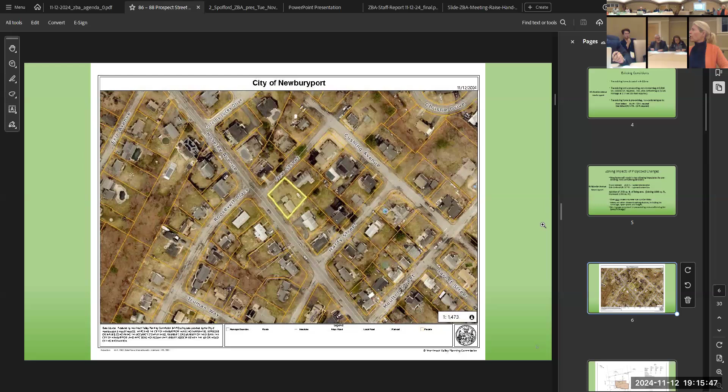First, this is our proposed site plan. This jagged line represents the footprint of the existing home. Here's the garage, with a breezeway that connects it, and here's the existing home. We are going up on these outside walls, so this will be the upward extension on the right side, and this will represent an upward extension on the front yard setback. And of course, this is the footprint of the new structure, essentially going up over the existing house plus this added section.

I'd also like to point out that we are changing the location of the driveway. Currently, the driveway is here off of Moseley Avenue. My clients are moving the driveway off to the side, off of New Street, which would be greatly beneficial to the property and to Moseley, since they won't have to be backing out onto that street anymore.

We've received comments from the DPS, and they are fine with the new curb cut here. I think they agree it's a much safer access to the home. We will have to repair some sidewalks here and provide a new street tree, and I suspect my client will put a street tree here as well just to make it look nicer. So we're more than happy to meet the DPS requirements.

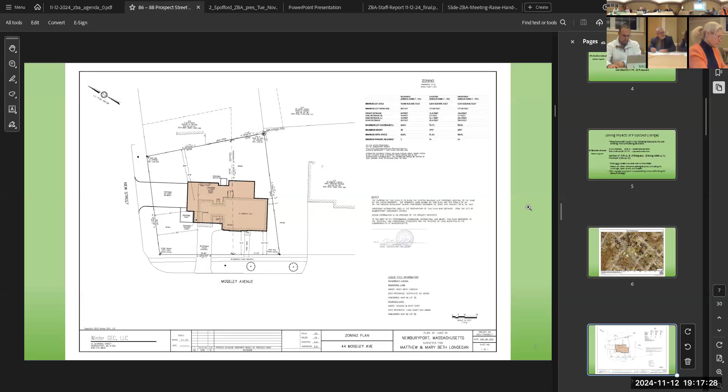Let me show you some pictures. This is the existing footprint of the existing home. As you can see, we've got a first floor here, the garage, and upstairs is an open bedroom area.

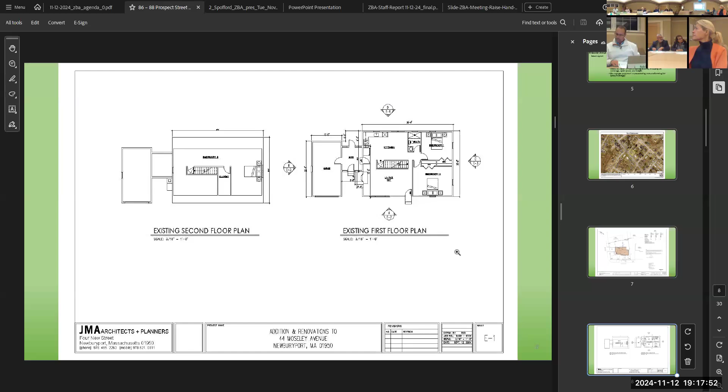Here is an elevation of the existing home. Our existing height, as I was just discussing, is just under 16 feet - it's about 15.9 feet. But that's the elevation of the existing home.

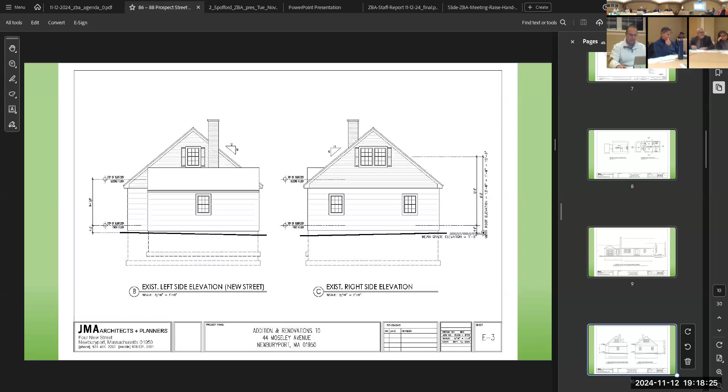These are just the elevations of the two ends of the existing home - this being the garage, this being the right side. And lastly, there should be an elevation of the rear of the home as it sits today. So there is our existing conditions. Again, our mean roof height is just under 16 feet.

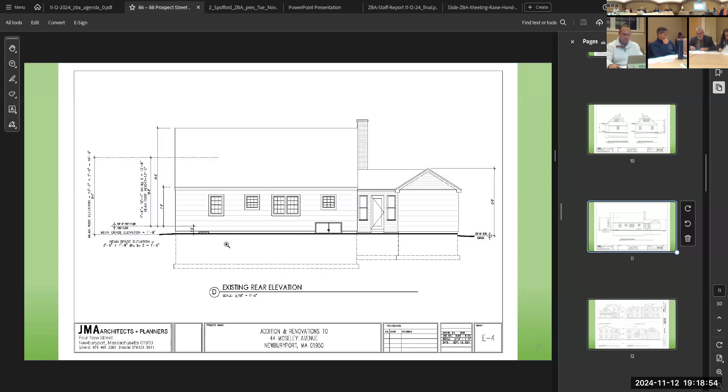And we'll be going up to just under 26 feet, so about a 9 to 10 foot increase in height, but we will still be well below the limit of 35 feet - some 9 feet below that.

So these are the elevation drawings of the new home. This is the front elevation that will be facing Moseley Avenue, and the garage is over here on the right off of New Street. This is the left elevation that will be facing New Street - you can see that our main entrance and our garage will now be on the side.

And then at the other side, we have the right side elevation here, and this is our rear elevation with the garage being here. Again, this new structure is proposed to be at 25 feet, 9.5 inches in mean height.

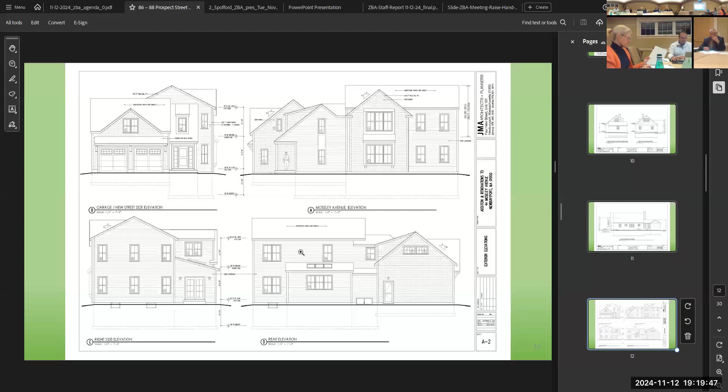These are the floor plans for the new home. As you can see, they are proposing to put a master bedroom suite on the first floor with dining and living space, bathrooms and laundry. Upstairs will be 3 additional bedrooms and 1 bathroom. And then this is the shop room that's proposed over the new garage.

My clients, as I understand, this home has been in my client's family for a long time. She grew up in this home, and so now she's rebuilding it.

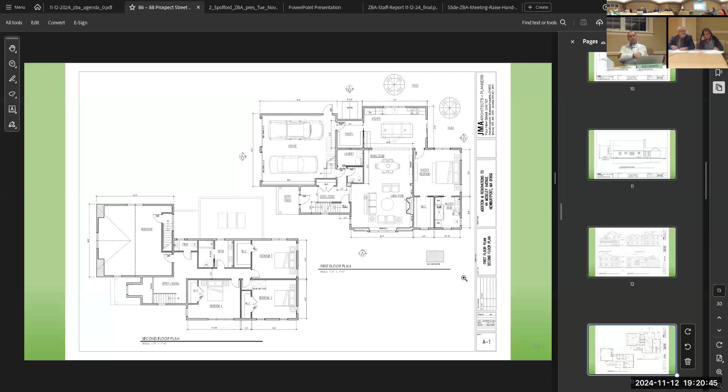They're rebuilding it so that she and her husband can retire here. That's why they're putting the first floor master in, so they can age in place. Interesting story - this has been in her family for years, and this is where Mary Beth grew up. If we go to the next slide, that's the basement floor plan.

Sorry to bore you with that one. I'm sorry, Kate, I know we're going to get to a picture eventually here.

Their daughter is living there, and I think our clients are going to move in there while the new house is done, and then they'll move into the new house, and the daughter will continue to live next door.

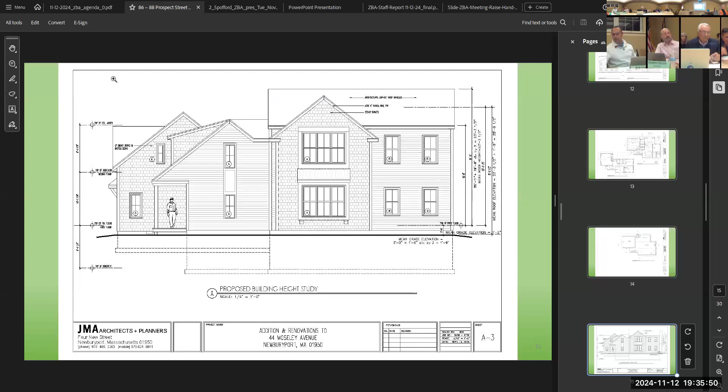Very good, motion with condition has been made by Mr. Bennett. Do we have a second? Thank you, Ms. Scow. Motion is made by Mr. Bennett and seconded by Ms. Scow. Calling the roll: Mr. Delisle, yes. Mr. Bennett, yes. Mr. Ginta, yes. Ms. Scow, yes. And Rob Champetti, I vote yes. It's 5 in the affirmative, the ayes have it, motion carries.

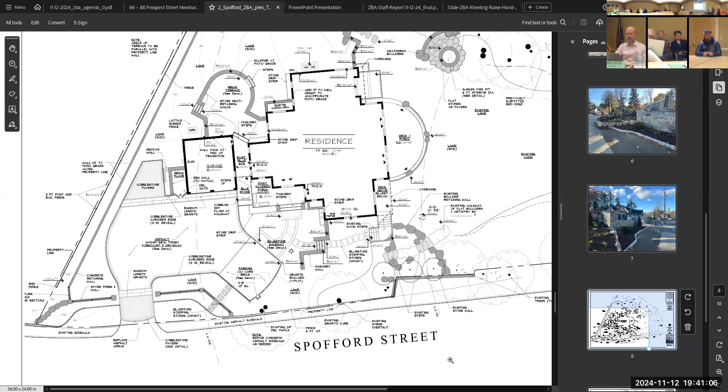Very good. Anything further that you want to highlight in the presentation? We have all of this in front of us as well, but no, it's fairly self-explanatory what we're asking for. I don't think I have anything further. Great, thank you. You're welcome.

We'll close the presentation portion of the hearing and go to public comment. Anyone in the room? Seeing no hands, anyone online? Seeing no hands, so we'll close public comment and go to questions from the board. Anyone want to jump out first if there's any questions?

Help me to understand this. I take it you constructed the stone fence, correct? Correct. And was this an ad hoc decision that was made in the field that you wanted to

add this additional 2 feet of lattice work? Is that how this came to be? Under the permitting process that we went through for this, it was unbeknownst to us, we were just unaware that we needed a variance for a 6 foot fence within that, just because of what was existing there. So that got skipped over. And when this went through, the real permit that we went through was all through conservation. So all this was on the original plan to go through conservation.

Under the construction of this, it was brought to our attention pretty quickly that we needed a permit for all these regulations. So we did go and get a building permit, and that got passed through every department because we've met the criteria for the 4 feet of structure. So we're really going for that extra 2 feet and the 6 foot fence going down the property line. Zoning passed this portion because they weren't going to count the columns at this current time, under the understanding that this was a fairly simple process. So yes, it was always thought to do it this way, but it wasn't an afterthought. It was just this whole process is an afterthought, so unfortunately.

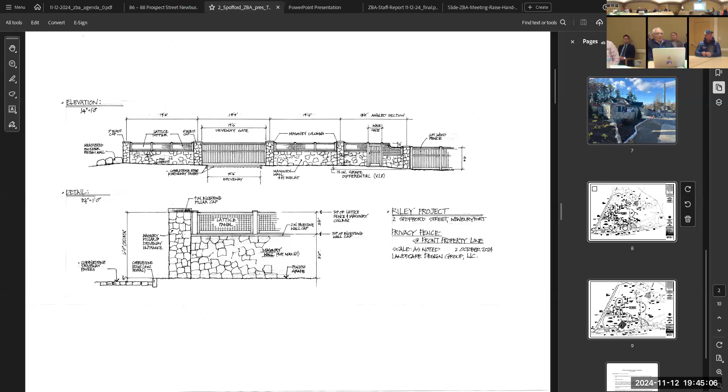That 90-foot expansive fence will be stone? Nope, it'll be the same fashion here, 4 feet. If you look on the far right of that last picture, yeah, no problem, right there you can see the stonework ends and then just a 6-foot fence carries on. And what's the nature of that fence? That would just be wood, I would assume. It's going to be probably a cedar of some sort, 5 feet tall, and then the last foot is going to be a lattice.

So will it be a picket type fence or will it be a solid fence? Solid for the first 5 feet. Solid for the first 5, yep.

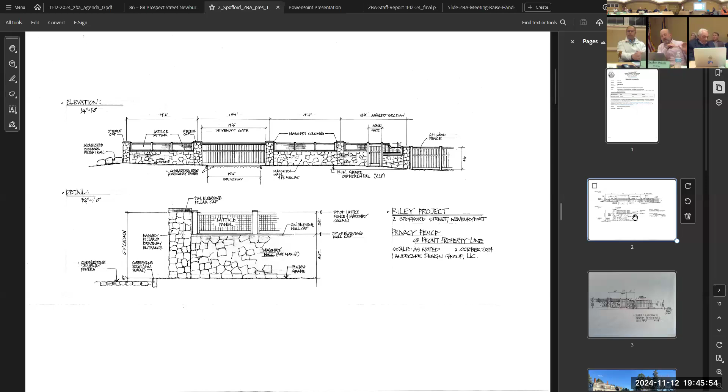Okay, Gary. Okay, Mr. Delisle, you had questions? Yeah, just sort of following up, so the stone wall portion, how many feet is it from the corner where it begins through the driveway to the corner where it ends, how much? The stone wall portion, I'm not understanding your question quite there. If I can pull up the site plan.

Yeah, the stone wall from the corner on the left to the place on the right where the stone wall ends, how many feet is that? Oh, it's approximately 17, 23 through 40, and another, and then it returns back to the street, so you're going to be probably like roughly at 50. So that's 50 feet worth of stone wall. Mhm. Plus lattice at 6 feet tall.

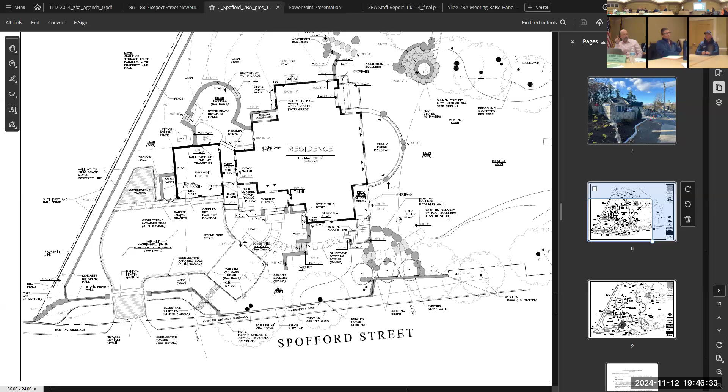Stone 4, lattice would be 2. Yeah, on top of, so in total it's 6 feet tall, right? Correct. Yeah, okay, so that's, then, what you said, that was 50 feet? Mhm. Okay, so then you have that plus 80 or 90 feet, so we're looking at 130. No, it would, it's probably closer to like 75 from the end of the stone wall to the end. It's not as long as 90, that would include the wall portion of that. Okay, so it's roughly 125 feet of 5 to 6 foot wall

along parallel to Spofford Street. Correct. Yeah, if you're including the wall and the fence as a wall. Yeah, in total. Yeah, okay.

Mr. Ginta, was there an existing fence that stretched that 80 feet? Yes. And how tall was that fence? There was one existing that was 4 feet, white picket, with tall plant material around it that stretched above 6 feet. It's all ornamental grass with large rhododendron shrubs in there.

And then from that point, there was a space in there. I don't know if the fence blew down before we got involved with the project, I don't know why that gap was there. But then it carried the 6 feet all the way to the bridge that's still standing today. It's still there, that fence is 6 foot right now. Well, the top of the fence is 6 feet, but it's 5 feet with a 1 foot of lattice on it, and it's vinyl.

And the ordinance talks about front yards. Is this the front yard of this home? It's kind of in a little nook. We always consider this a contention with everybody, but technically it's where the front door is, and the front door would be on the driveway side. So yes, I would have to think that is considered the front, but the front of the house, the architecture of the house really is from the deck all the way down towards the river. That's how it's architecturally designed, but the front door is kind of on the side, on the driveway side.

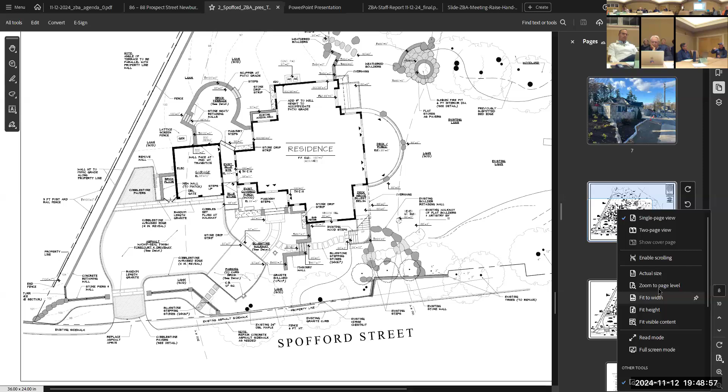So from the owner's perspective, through you, why not a 4-foot fence? What would be the reason for a 6? The bigger reason against the 4-foot fence is it doesn't do anything for the traffic. Being at the elevation the property comes up, you're standing on the porch, your feet are basically at the height of that 4-foot fence. So if you're in your driveway, 4 feet's only to here, and all the cars and the noise is right there because it's so close to the road. So the 6-foot fence just gives you a little bit more privacy from that roadway.

Yeah, I know this house well, only from driving past it every day. Me too. I see the work that you're doing there, and I understand the conditions you're dealing with there. It's a very loud and noisy site. Okay, thank you. You're welcome. That's all, are you? I'm all set, thank you.

I think that goes to one of the elements we're looking at here, that to grant a variance, the lot really is unique, and what you're seeking is because of the uniqueness of the lot.

Can you go to, there's a picture here with an overview. It kind of shows the topography of the lot. If you could just review that a little bit, because it does seem quite different than the standard lot in Newburyport. It's been a challenge. I know, it's in the staff report. Yeah, that, if there is such a thing as a standard lot in Newburyport. Well, that's true, true.

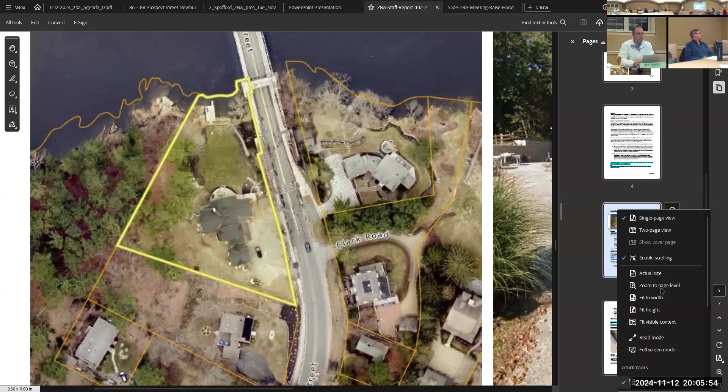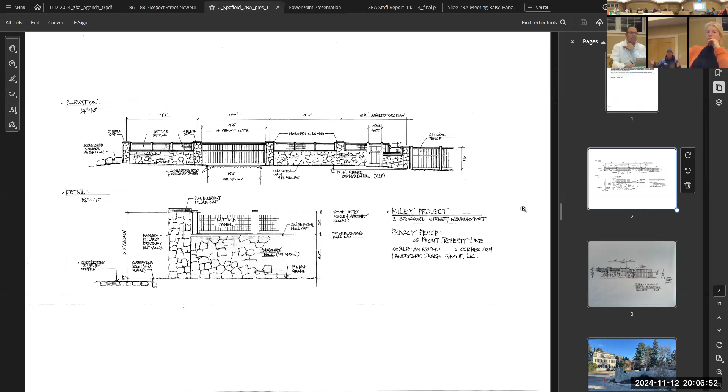Solid wood. And did you say that where there's a cedar fence going down to the water, there's currently a vinyl fence there that we're going to leave, since it's existing? I think that existing section of fence is roughly 45 to 50 feet long as it stands today, so we have a gap here.

May I ask a question? Of course. My colleague's concerned about safety, is the entire lot fenced, including the portion that goes down towards the river? We have a fence that goes across the top of the wall, from Spofford Street back to Moseley. Then there's just a natural stone wall that separates the property, and a fence we're proposing to go from the corner of the lot back to the bridge to fence it out. But there's not a fence on the Moseley side, that's the only side without any fence.

Can I interject? Please do. Thank you. So the vinyl fence is still there? Yeah, it is. All but 20 or 30 feet of it? I didn't pull a tape measure out for it, but all but, let's call it 30 feet, that's between the wall and where the vinyl fence starts.

I'll make one observation. I am not so much concerned about the lattice work on the stone fence. It's tasteful. Is it greater than 4 feet? Yes, it's not solid. It's arguably within the spirit of what the city council was getting at when it didn't want high barriers blocking people in their home.

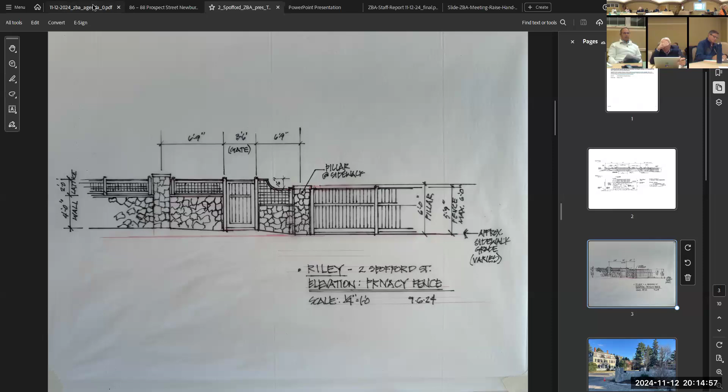So we'll see you on the tenth, and thank you for your patience and time. No problem.

Moving on to our fourth and final application this evening. This is the application of Judith Bliss Welch, trustee of the Judith Bliss Welch Trust, care of Lisa Mead, Talman and Costa LLC. This is the application for 101 Curzon Mill Road, a variance request. The applicant seeks all necessary approvals and permits to construct a garage with a second floor office. Thank you for your patience.

Thank you. It's been enlightening.

Thank you, Mr. Chair and members of the board. Lisa Mead, Talman Costa, 30 Green Street, on behalf of the applicant, Judith Welch, trustee of the Judith Bliss Welch Trust. With me this evening are Richard and Judith Welch, the owners of the property, and also my colleague Ryan Clemens. The architect on this project is Andy Sidford, the engineer is Everett Chandler, and we have a wetland specialist as well. Tom Hughes will be doing the permitting from the conservation point of view. As the chair indicated, the Welches are seeking a variance to construct a garage on the property, which is across the street from their home.

If you go to the next slide, Caitlin. The property is across the street from their home, which is the former mill on Curzon Mill Road. If you drove down Curzon Mill Road past Maudslay State Park to the very end, the Welches live in the mill, the last house on the left, right before the bridge you can walk across into West Newbury. I have a long story about that bridge from when I first came there.

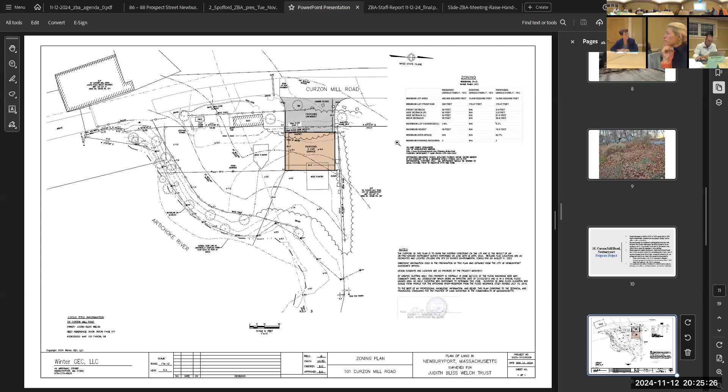You can see the floodplain lines running through, along with the 100-foot, 25-foot, and 50-foot buffers. The buffer line actually runs through the lower left-hand corner of the proposed location, so we do need Conservation Commission approval for this. But that's the location on the lot.

Next slide, please. As indicated earlier, this is the Conservation Commission plan, showing that it's built on pilings. The reason is you can't take up any flood storage area in the floodplain, so it has to be built on pilings, with the horizontal members of the first floor above the floodplain.

You're allowed to have the vertical posts, but you do have to make up the flood storage area for those. Otherwise, we have to raise it above the floodplain. So as you come in off the road, you'll go up a little bit, with a small ramp to get to park your car on the first floor. Those are the elevations and the Conservation Commission map.

You can see the floodplains and buffer zones. Caitlin, if you take that arc that goes right through the one boundary line through the proposed garage—see the arc? There you go, right there. I think that says 100-foot buffer zone right on it. There you go, so that's the 100-foot wetland buffer zone.

So you can see the reason we're up as far as we are is, A, to get out of the floodplain, and B, to get as far out of the buffer zone as we possibly can. Next slide, please.

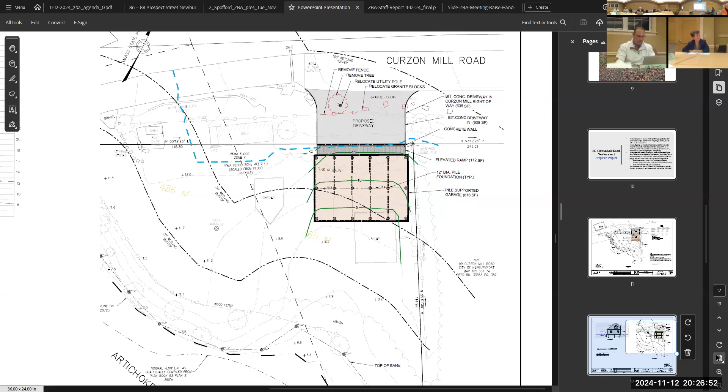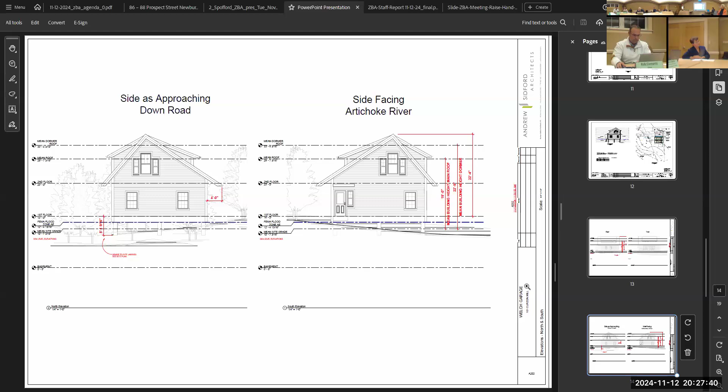Next slide, please. As discussed slightly in your prior hearing, the board may grant a variance where it makes a finding under section 10H6A of the zoning ordinance: that owing to circumstances relating to the soil condition, shape, or topography of the land or structures, there is a hardship that especially affects the land or structures but not generally the zoning district in which it's located; that literal enforcement of the ordinance would involve substantial hardship, financial or otherwise, on the petitioner; and that desirable relief may be granted without substantial detriment to the public good and without nullifying or substantially derogating from the purpose and intent of the ordinance.

So as we go to the first hardship related essentially to the land, in this instance the soil conditions, topography, and shape. As the NOI plan depicts, the floodplain runs into this property. Really, the only developable part of this property is up in that top corner. There is no other part of this property where a structure could be built, because of the wetlands and because of the floodplain. There is no other location.

Because of the shape of the lot, and in particular the natural flow of the Artichoke River, it has a very unique shape, which the applicant did not create. Even if the lot were larger, it still would have that unique shape given the natural condition of the river. And finally, even the topography of the lot is unique in and of itself, where there are uplands, wetlands, and lowlands in between in the lot itself, not just as it goes down to the river.

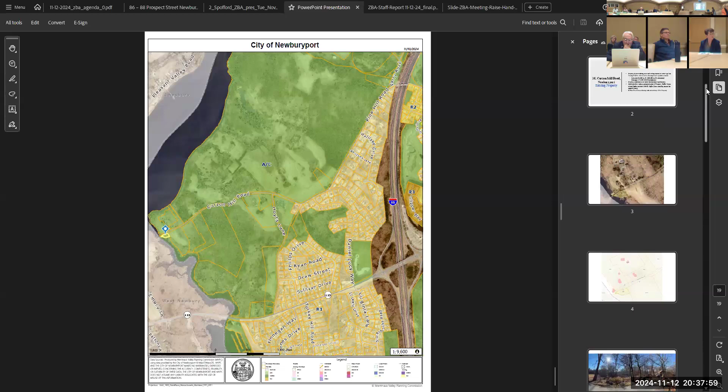Is this barn - I call it barn garage - going to look like it belongs on the property? Is it going to look historic? Yes, so if you could go to the architectural drawings. I think the outside should be shingled like the mill, yes, it's gonna be shingled like the mill. Will those be natural shingles? Right, they'll be natural cedar shingles. Okay, and the roof will be what material? Probably architectural shingles. Yeah, okay.

What will be inside this building? Will there be any utilities? There would be electric, because it's going to be an office upstairs, and the cars will park in there too, so there will be electric. I don't know if there would be water, maybe a bathroom on the second floor.

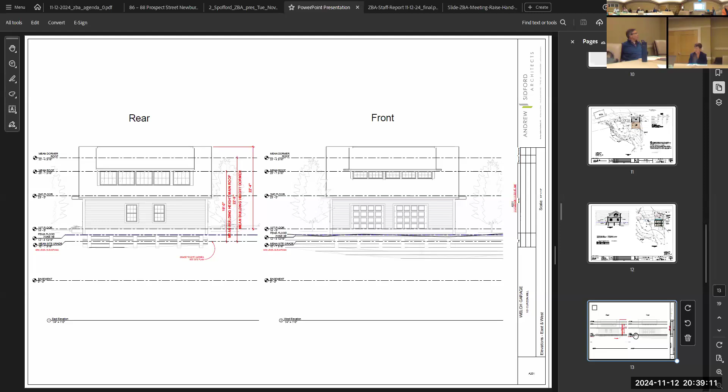You're going to raise this because it's close to the river. You said there's going to be a ramp. What would the ramp be made of? It's earth, right, it's going to be graded up.

So you see the foundation that's in front of the first pile. On the right is the front of the garage in that elevation. Do you see the foundation there? This is graded - this is a wall, an underground wall right there. The piles start here, and here's the earth right there. They'll be graded up to right here. There may be some material in that area, but it's graded up.

Have you not been through conservation yet? No, because you always decide what you're going to do first. Under the Wetlands Protection Act, the Conservation Commission can require you to get other permits first, they don't have to go first. But if we can't get a variance, we're not going to spend the money to go to conservation. In order to even see this was possible, we had to do a lot of conservation work - the wetlands have already been delineated, and we have an engineer on board who did the stormwater calculations to determine where the pilings would go and what would be displaced from the floodplain.

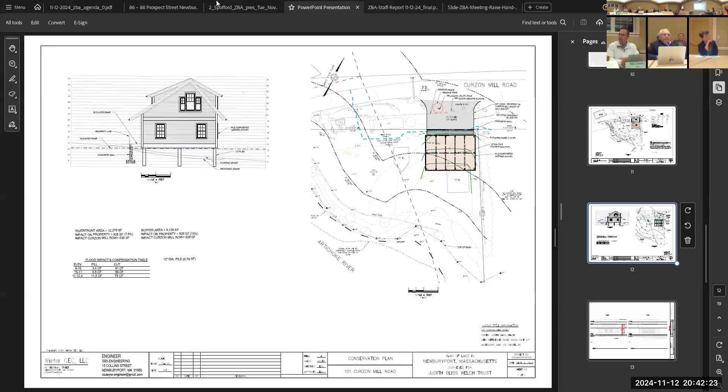Would you consider that a substantial hardship, to have to park there and walk all the way down to your house? I consider that a substantial hardship, but I consider it more of a hardship that you can't do anything at all here, except locate something up in this corner. And that's not their right - that's by grace that they're parking there. They don't have an easement to park there, it's just by the neighbor's grace - their sister-in-law - that they're letting them park there.

You thought of a tunnel. A tunnel, yeah - there'd be no permits involved.

I do have a follow-up question, and I think you just answered it - essentially, without a variance, there's nothing they can build on that lot. Can't build anything on this lot because of the floodplain, and because the 100-foot buffer goes here, then the 50-foot buffer goes here. The only place to build is right up here. We actually looked to see if you could put something here because it's closer, and it's beyond the gate, but you can't put anything there. The only place to build is right in this corner. We tried to pull it away, but you can't because you get too far into the floodplain.

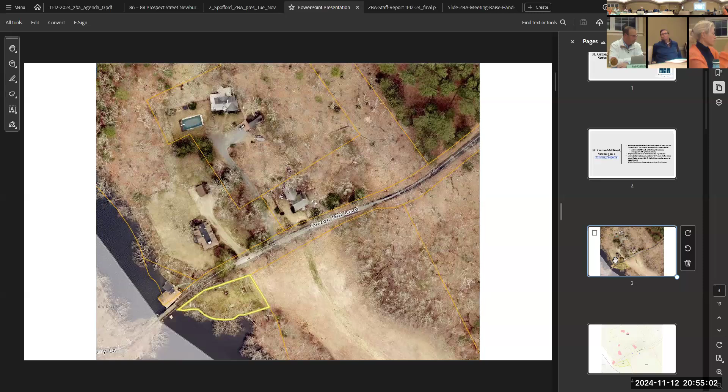Thank you very much. Thank you, and good luck. Nice to see you. Cheers.

Okay, that concludes our public hearings this evening, and with that we'll close public hearings for the ZBA meeting of 11/12/2024. For the business meeting, we really only have the approval of our minutes of 10/22.

Any comments, changes, direction? We have a motion to approve the minutes. Motion to approve, thank you. Seconded? Second. Great, all those in favor, this is a voice vote. Say aye. Aye. Opposed or no votes? The ayes have it, motion carries, it's approved. Thank you, Gretchen.